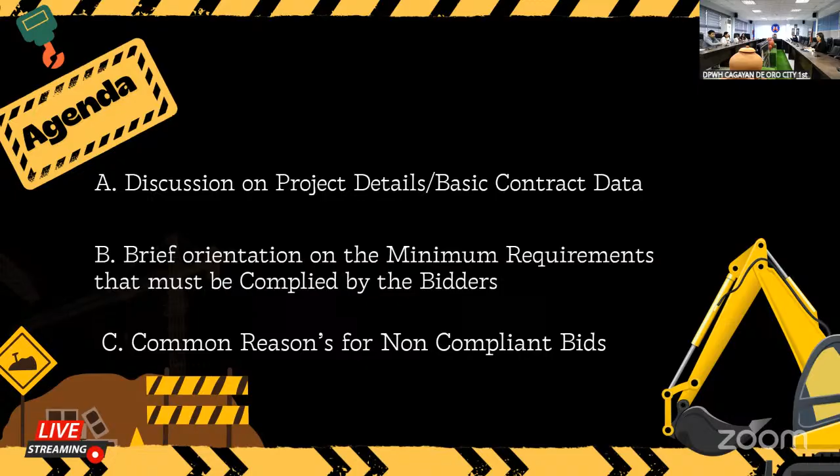Thank you, Gwen. So we are in quorum, so we'll now start the pre-bidding conference. So this afternoon, there are 5 projects scheduled, namely:

26KH0013, the contract name construction, completion of multi-purpose building, Barangay Center, Barangay Pagatpat, Cagayan de Oro City, with an approved budget for contract of 2,969,971 pesos and 30 centavos.

Second, we have 26KH0014, the contract name asset preservation, construction, upgrading, rehabilitation of drainage along National Roads, secondary roads, Carmen-Patag-Bulua Road, Chainage 0 to Chainage 130, station K1443 plus 531 to station K1443 plus 581, with an approved budget for contract of 6,447,839 pesos and 17 centavos.

So third project, we have 26KH0015. This is the rehabilitation of road at Barangay Bayanga, station 0 to station 0+200, Cagayan de Oro City, Misamis Oriental. This has an approved budget for contract of 4,293,805 pesos and 40 centavos.

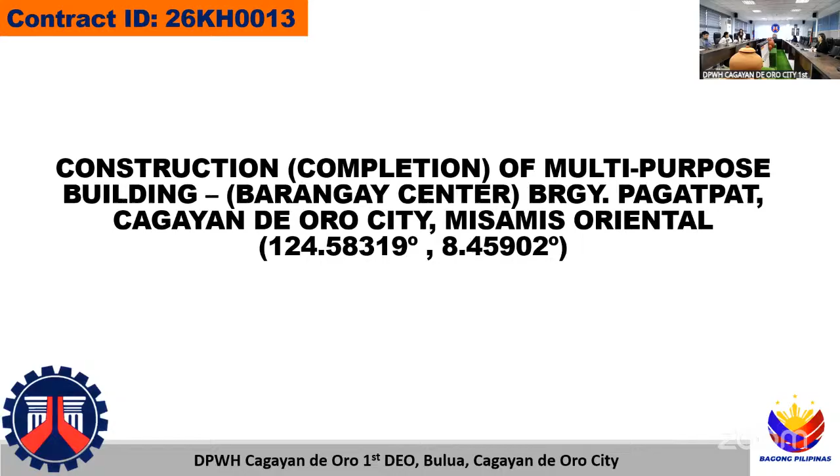So the scope of work of this project is mainly the construction of the extended two bays of the existing covered court with electrical works and elevation of the existing basketball court concrete slab with painting lines.

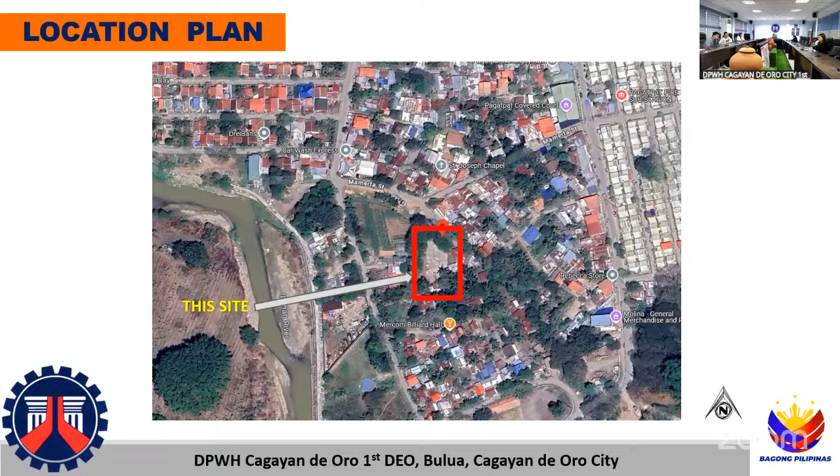So this is the location plan at Barangay Pagatpat, their Mamerta Street. As you can see on the red box, that is the site to be constructed. And this is the location plan.

And these are the site photos. So this is the existing building, or existing covered court and structures. As you can see, this is a perspective on your left side. That was the existing building structure, consisting of the covered court, concrete slab, and light fixtures.

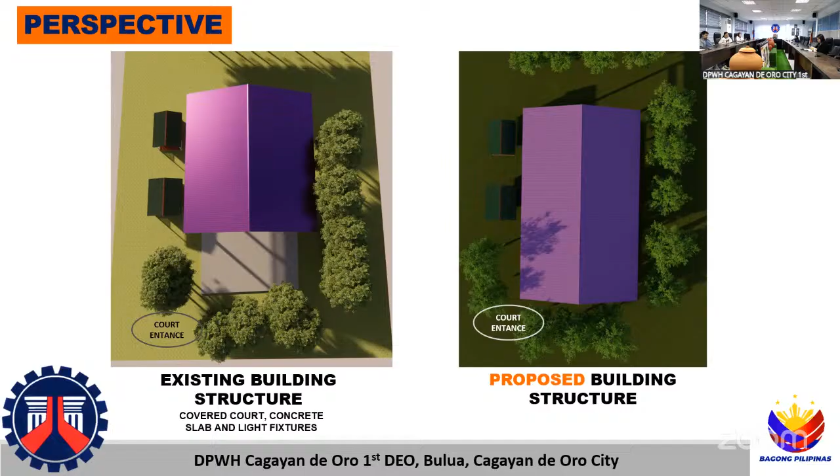On the right side is the proposed building structure to be constructed. So this is what the covered court would look like when two bays were added.

So this is our layout plan. As you can see, the red lines are the existing building and structures. And the blue lines are the proposed building and extension layout of that structure.

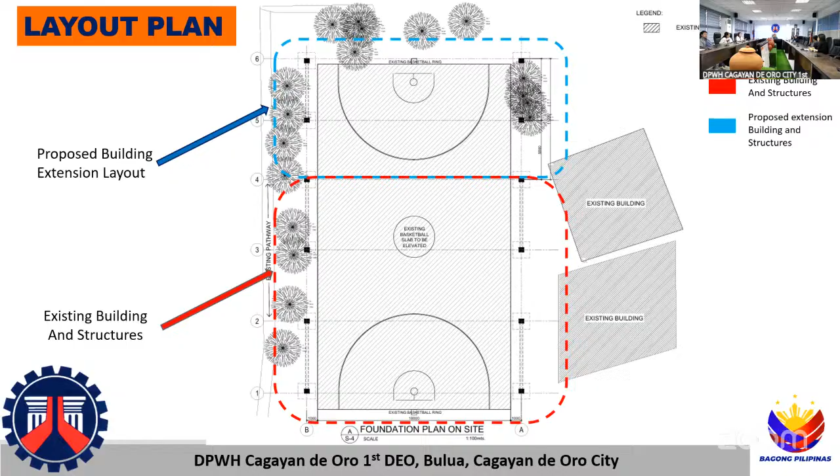So for the floor plan of architectural, we have the ground floor plan. As you can see, 8 columns are already existing.

And this is our roof plan. The roof plan is a gable roof or double roof slope, just like the existing roof.

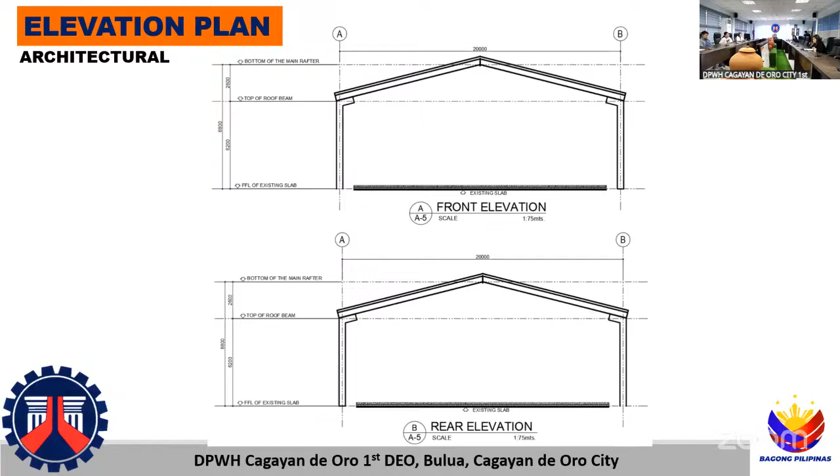So these are the elevations: the front, the rear, the left side, and the right side. The cross section and the longitudinal section.

So for structural, these are the foundation plan and the roof beam plan. And for the roof plan, we have the frames of the roof plan.

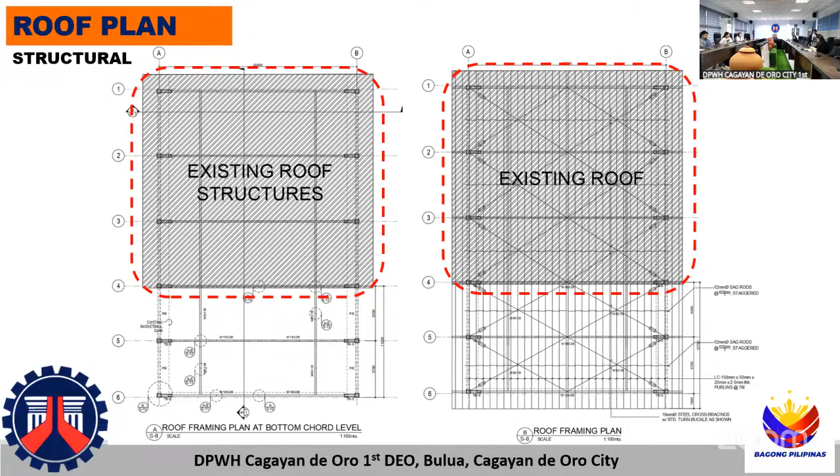And for the structural cross section and structural longitudinal section. Okay, so...

Just like the existing trusses, we're still using the same specification of our steel structure, which is the 16x36 and 8x80.

And these are our schedule for footing. We have footing 1,500 width and 1,600 length with thickness of 300.

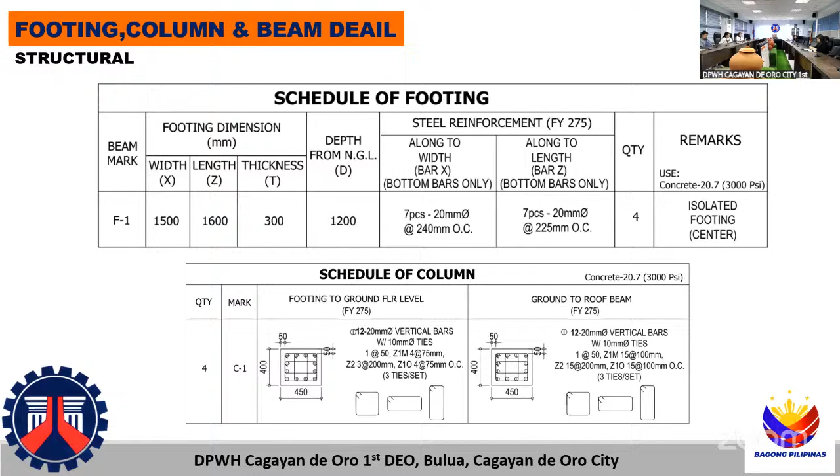And for the column, and for the concrete beams, and for the trusses.

And for the power layout, we only have 1 switch to be installed, and 4 of them already existed. And for the grounding, we only have 1 installation for the proposed, and also 1 for the roof air terminal.

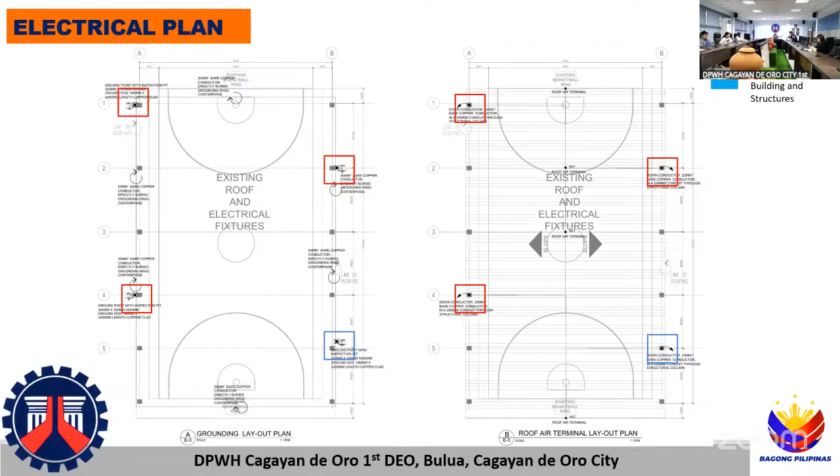So let's not forget our safety warning signs. We have proper PPE signage, safety first which are SF1 and SF2, hard hat area, danger deep excavation, beware falling debris.

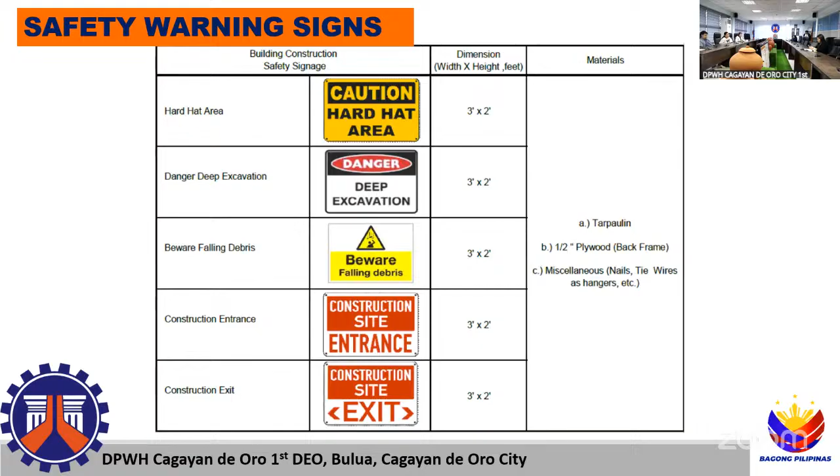Construction entrance and construction exit, safety harness, welding and hot work area, authorized personnel only, fall hazard, temporary material stocking area.

And for the summary of quantities, we have in Part B, other general requirements: B51, the project billboard signboard, which is 2 each.

B71, occupational safety and health, 1 lump sum. B91, mobilization and demobilization, 1 lump sum.

And for Part C, earthworks, we have 803-1A, structure excavation common soil, 31.35 cubic meter. 800-3, individual removal of trees above 900 mm diameter, 2 each.

804-1A, embankment from roadway structure excavation common soil, 70.22 cubic meter. 804-2A, embankment from borrow common soil, 38.86 cubic meter.

804-7, gravel fill, 58.56 cubic meter. And for Part D, reinforced concrete, we have 900-1C, structural concrete 3000 PSI class A, 28 days, 12.08 cubic meter.

902-1A1, reinforcing steel deformed grade 40, 4,654.05 kilograms. And 900-2C, structural concrete class B, 28 days, 67.60 cubic meters.

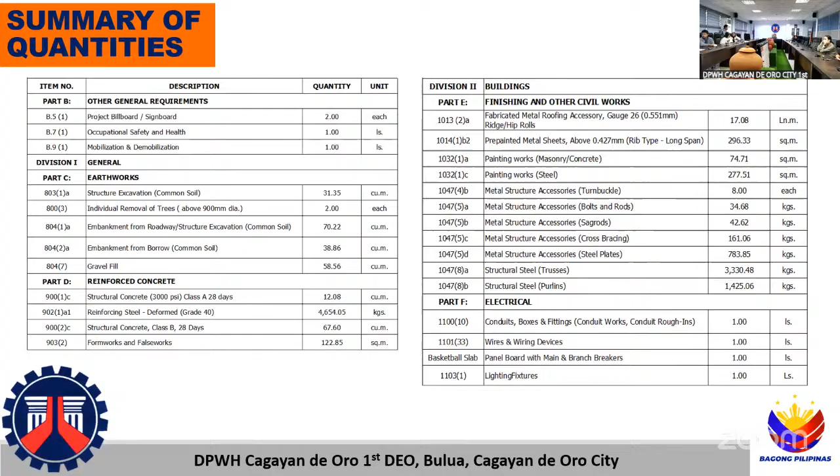For that part, I'm going to edit, I'm sorry. So for panel board with main and branch breakers, 1 lump sum. 1103-1, light fixtures, 1 lump sum.

And for the conduits, boxes, and fittings, this is our lump sum. And for wirings and other devices, for panel boards with main and branch breakers, and lighting fixtures.

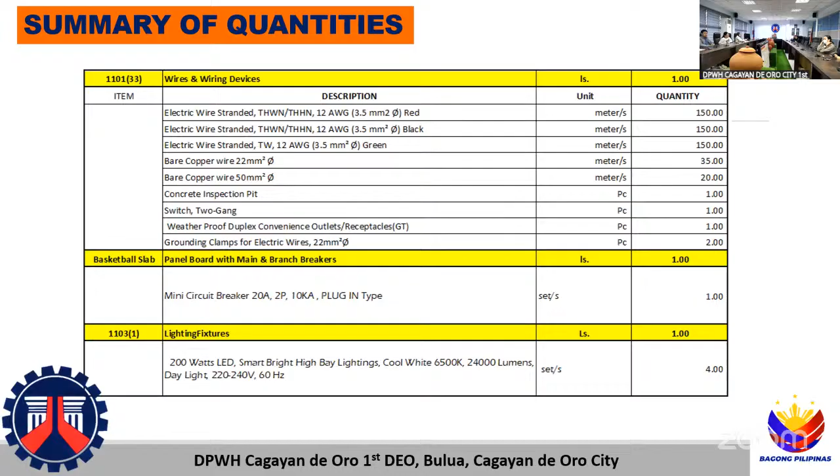And for minimum equipment requirement, we have stake truck cargo, 1 unit owned; concrete vibrator, 2 units owned; backhoe, 1 unit owned; dump truck, 1 unit owned; bagger mixer, 1 unit owned; bar cutter, 1 unit owned; bar bender, 1 unit owned.

Welding machine, 1 unit owned; material testing apparatus, 1 set owned; minor tools, 1 set owned; truck mounted crane, 1 unit owned and 1 unit leased; plate compactor 5 horsepower, 1 unit owned; chainsaw, 1 unit owned.

For number 3, grinding machine with accessories, 1 unit owned.

And that concludes my presentation. Thank you. Any clarifications?

Questions, clarifications? From our perspective, we have Sir Deo and Sir Nam. Do you have any questions? None so far, sir.

And also from our online viewers, we have questions. There's none, sir. And also we'd like to clarify...

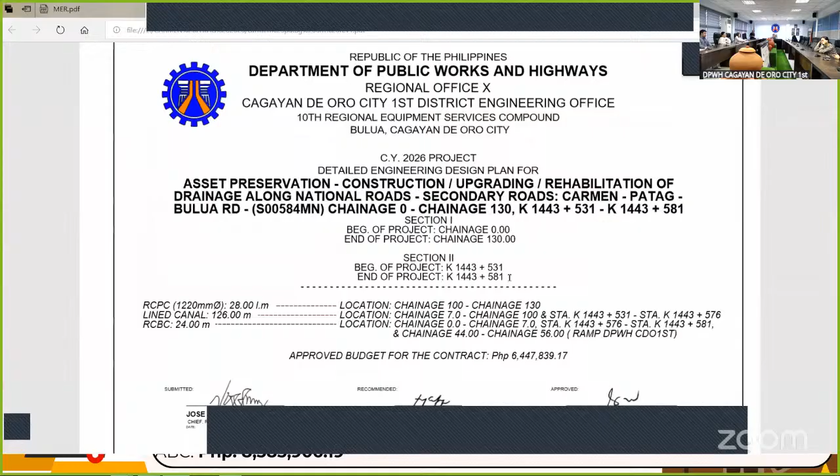I'll be discussing the asset preservation, construction, upgrading, rehabilitation of drainage along national roads, secondary roads, Carmen-Patag-Bulua Road, section ID S 00584 MN, Chainage 0 to Chainage 130, Station K1443+531 to K1443+581. Size of RCPC is 1,220 millimeter diameter, located on chainage 100 to 130. Lined Canal, 126 meters, located chainage 7 to 100, station K1443+531 to K1443+576. RCBC is 24 meters, located on chainage 0 to 7, station K1443+576 to K1443+581, and chainage 44 to 56. Approved budget for the contract is 6,447,839.17.

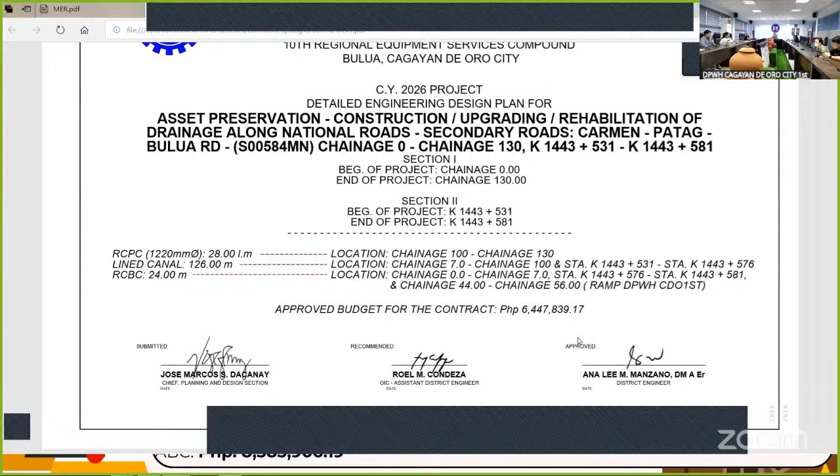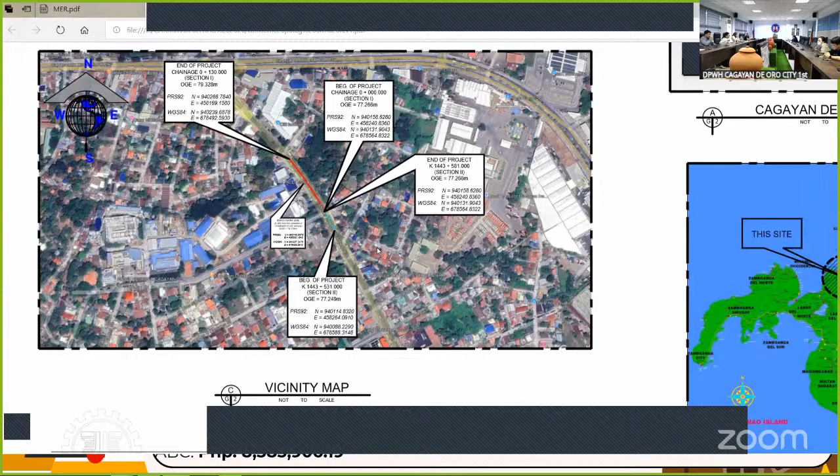This is the table of index of the content of this project plan. For general drawings, we have the vicinity map with all the details, the beginning and end of every section, Section 1 and Section 2, with PRS 92 and WGS 84 coordinates. You also have the location map.

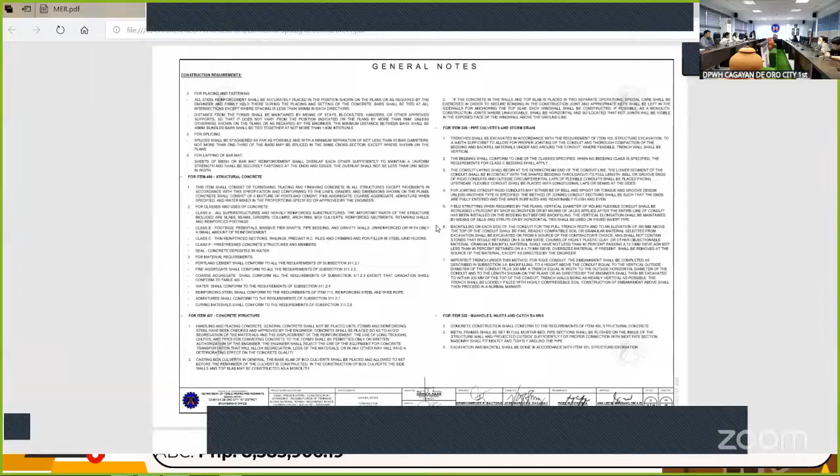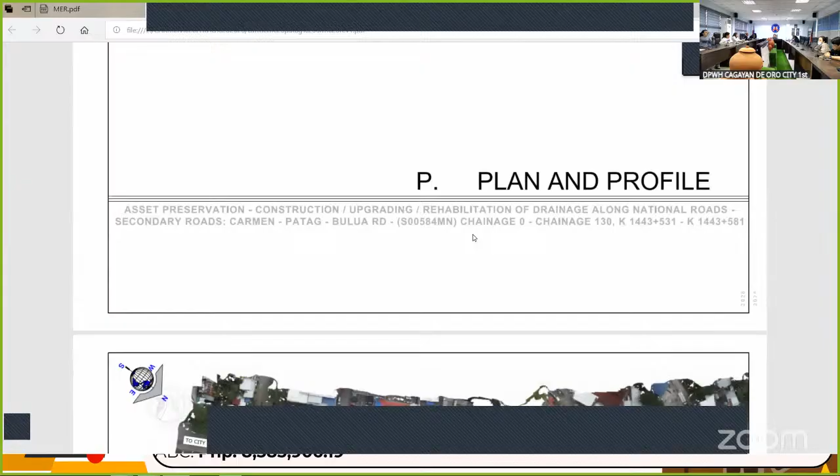This is the traffic management, which I'll discuss later, and project billboard details for plan and profile. Section 1 is located in front of DPWH First District. The 0 is the center line from the regional road, DPWH region office, to 130 meters. It's on the corner between the gas station and the co-op building. This is the plan and profile, designed in vertical elevation. Section 2 is aligned to Section 1, but before Section 1's location.

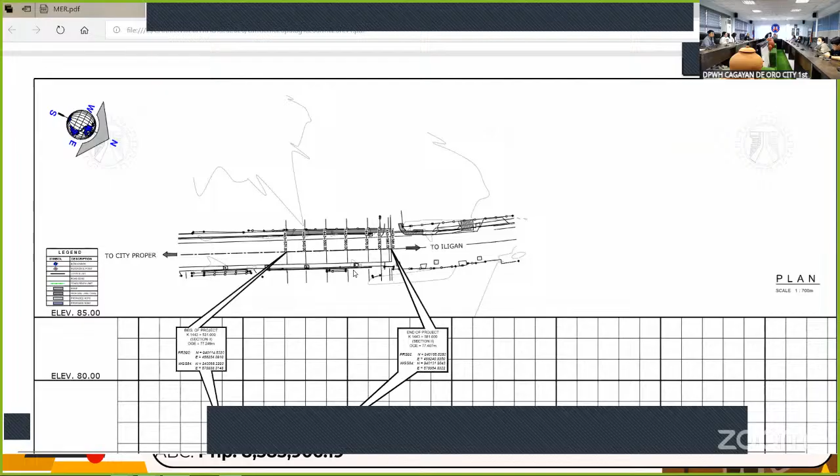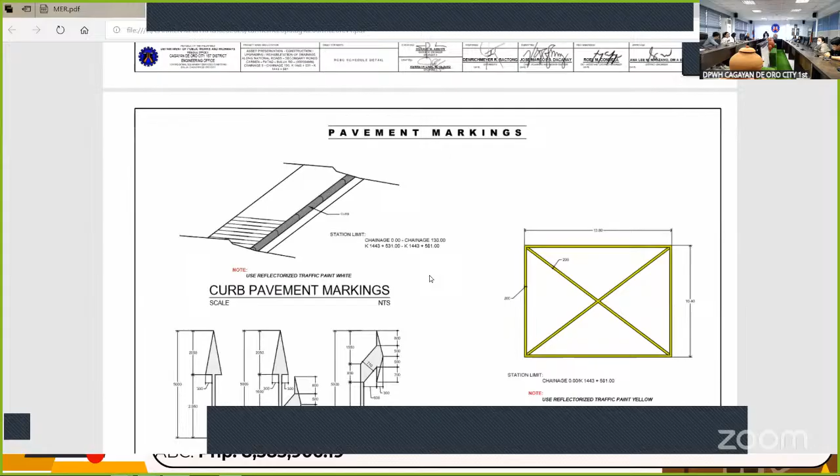Typical drawings — this is the typical detail, fix and removal and canal detail, RCBC schedule detail. Pavement markings include curb pavement markings, standard pavement arrows, and markings after the intersection. For electrical drawings, we have solar lights, which is why it's included in the plan. This is the detail, including the solar panel.

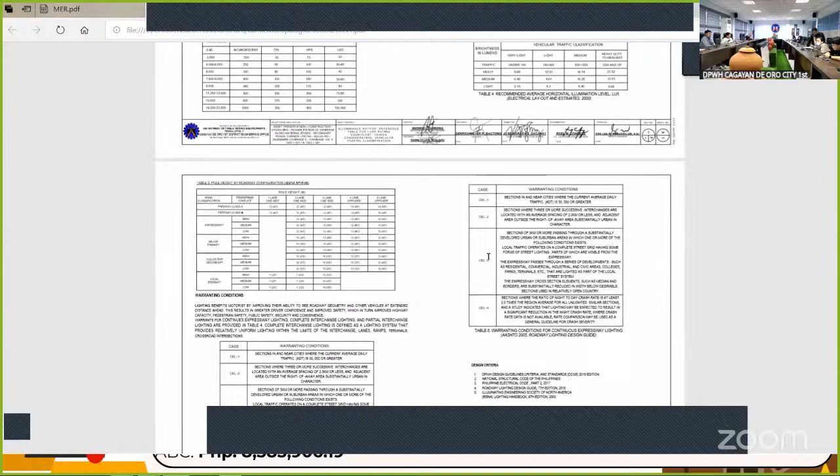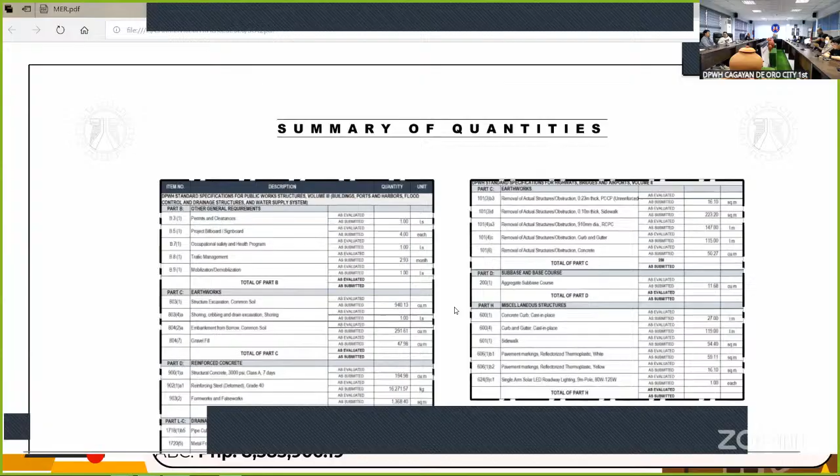For a summary of quantities, under DPWH standard specification for public works structures, Volume 3 — buildings, ports and harbors, flood control and drainage structures, and water supply system — we have 5 parts. Part B, general requirements: B.31 permits and clearances, 1 lump sum; B.51 project billboard signboard, 4 each; B.71 occupational safety and health program, 1 lump sum; B.81 traffic management, 2.93 months; B.91 mobilization, demobilization, 1 lump sum.

Part C, earthworks: 803(1) structure excavation, common soil, 940.13 cubic meter; 803(4)A shoring, cribbing and drain excavation shoring, temporary structure, 1 lump sum; 804(2)A embankment from borrow, common soil, 291.61 cubic meter; 804(7) gravel fill, 47.98 cubic meter. Part D, reinforced concrete: 900(1)A structural concrete, 3,000 PSI, Class A, 7 days, 194.98 cubic meter; 902(1)A1 reinforcing steel, deformed, Grade 40, 16,271.57 kilograms; 903(2) formworks and falseworks, 1,368.40 square meter.

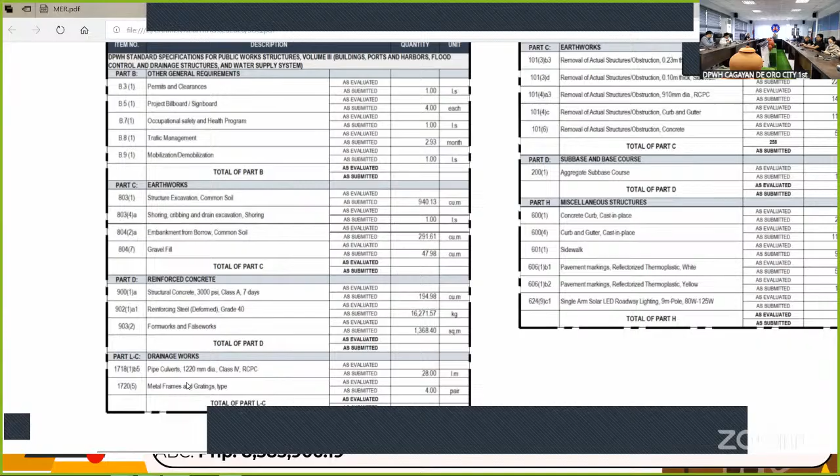Under Part LC, drainage works: 1718(1)B5 culverts, 1,220 millimeter diameter, Class 4 RCPC, 28 linear meter; 1720(5) metal frames and gratings, 4 pair.

Under DPWH standard specification for highways, bridges and airports, Volume 2, Part C earthworks: 101(3)B3 removal of actual structure obstruction, 0.23 meter thick PCCP and reinforced, 16.10 square meter; 101(3)D removal of actual structures obstruction, 0.1 meter thick sidewalk, 223.20 square meter; 101(4)A3 removal of actual structures obstruction, 910 millimeter diameter RCPC, 147 linear meter; 101(4)C removal of actual structure obstruction, curb and gutter, 115 linear meter; 101(6) removal of actual structure obstruction, concrete, 50.27 cubic meter. Part D, sub-base and base course: 200(1) aggregate sub-base course, 11.68 cubic meter.

Part H, miscellaneous structure: 600(1) concrete curb cast in place, 27 linear meter; 600(4) curb and gutter cast in place, 119 linear meter; 601(1) sidewalk, 94.40 square meter; 606(1)B1 pavement markings, reflectorized thermoplastic, white, 59.11 square meter; 606(1)B2 pavement markings, reflectorized thermoplastic, yellow, 16.10 square meter; 624(9)C1 single arm solar LED roadway lighting, 9 meter pole, 80 watts, 125 watts, 1 each.

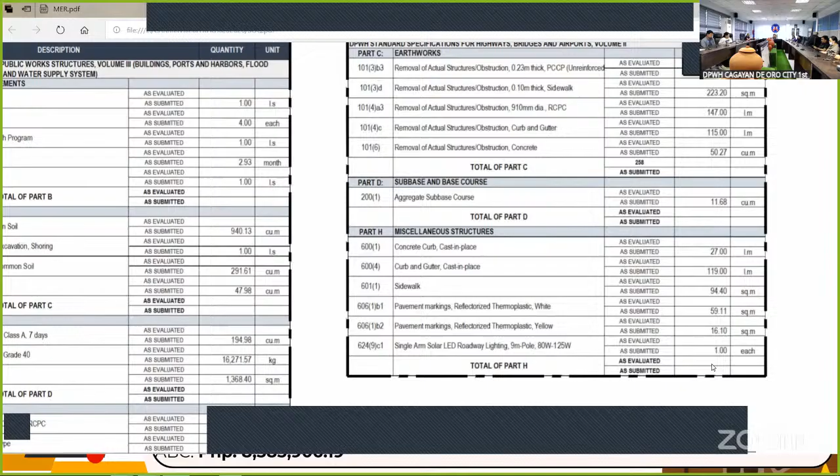This is the minimum equipment requirement required for the project construction.

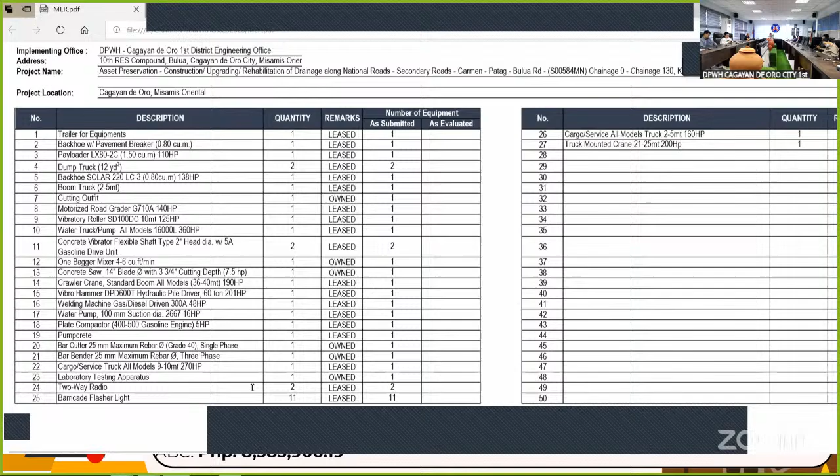Bar bender, 25mm maximum rebar diameter, 3-phase, 1 unit. Cargo or service truck, 1 unit. Laboratory testing apparatus, 1 unit. Two-way radio, 2 units. Barricade flasher light, 11 units. Cargo or service truck, all models, 2 to 5 metric tons, 1 unit. Truck mounted crane, 1 unit.

So that will be all. Any questions or clarifications from our prospective bidders? And from our online viewers?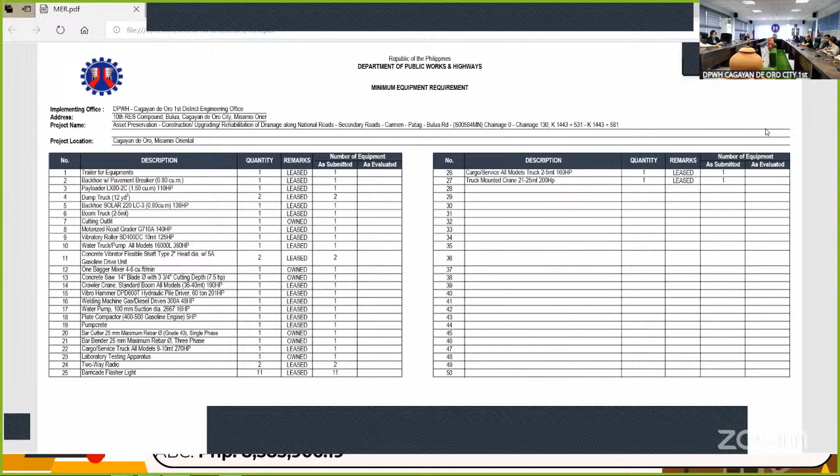So we proceed with the next project. This project is subject for visibility, so I'll update our prospective bidders, this project will be subject for bid. So the third project, 26KH0015, details of this project will be discussed by Engr. Aris Calisum.

Good afternoon, everyone. Rehabilitation of road at Barangay Bayanga, Station 0 to Station 200, Cagayan de Oro City, Misamis Oriental, Barangay Bayanga, Cagayan de Oro. This project has two sections: Section 1 has Station 0 to 146.12, and Section 2 has Station 0 to 53.88.

In total amounting to 200-meter length, the approved budget for the contract is 4,293,805.40. The scope of work is construction or improvement of the existing gravel road to a paved road with PCCP width of 3.05 meters, both sides, and thickness of 0.23 meters. There's also removal and replacement of the existing paved road in the beginning section of the project.

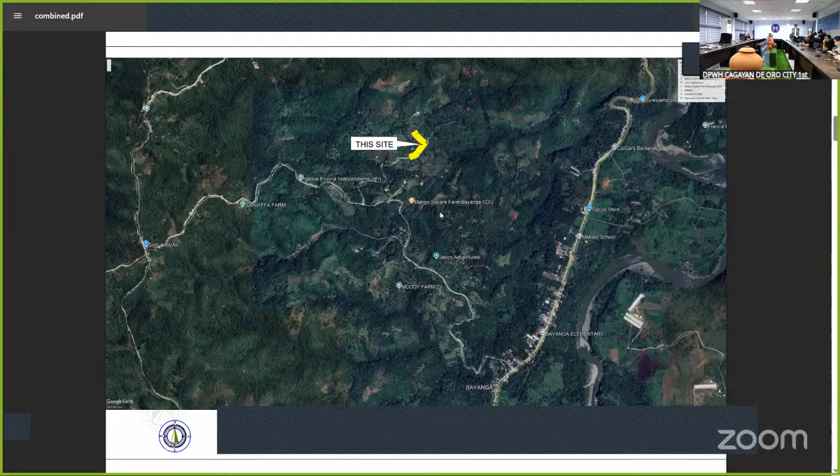And installation of solar LED roadway lightings. The general drawing shows it is located in Barangay Bayanga. If we look at this road, for familiarity, it's the road going to Hantiko Adventures, then you go to the right side. It's also the access road towards one of our tourism caves. So this is the site, and I have here Section 1 and Section 2.

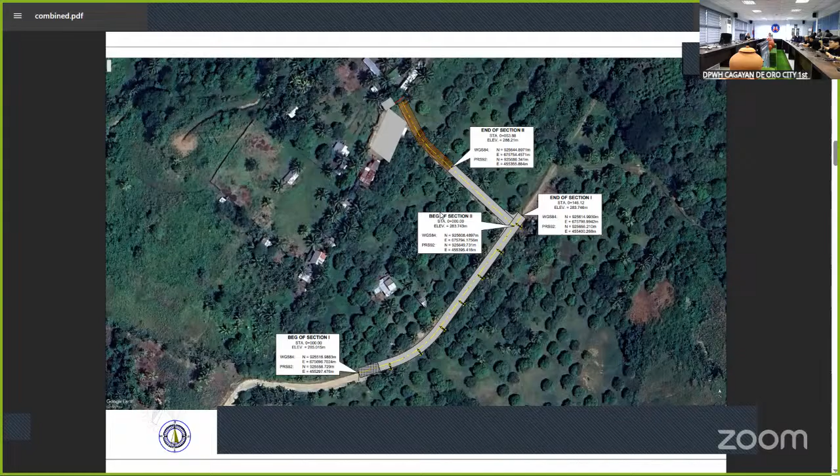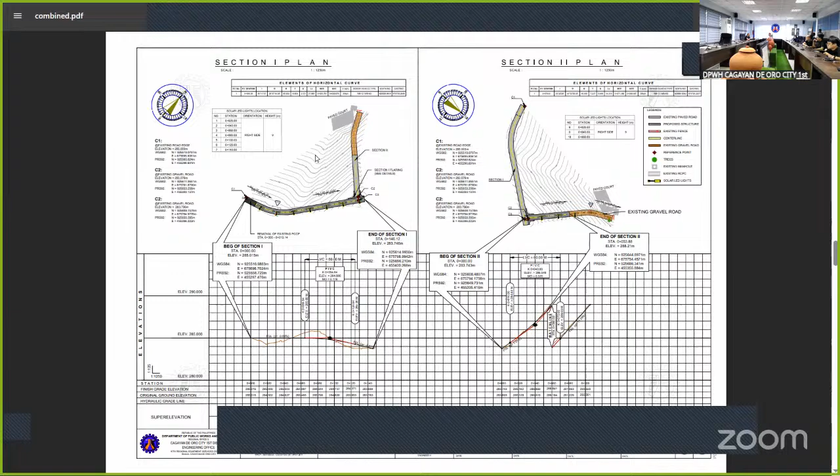So the beginning of Section 1 has a 13-meter remove and replace portion, then the rest is construction or improvement of gravel road to paved road. This is the disposal site plan. For familiarity, these are the site images, beginning and end of the project. For the plan profile, this is the plan and profile, also showing the placement of the solar LED roadway lighting.

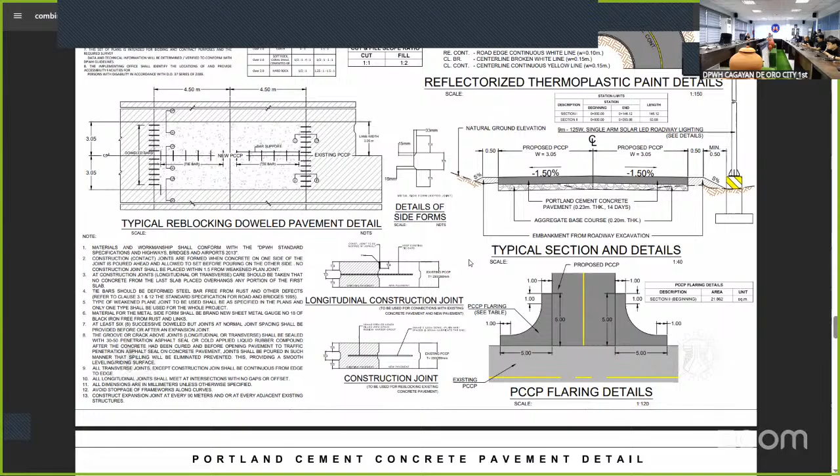For typical drawings, this is the typical drawing. The road will be composed of two lanes, 3.05 meters width, with installation of the solar lights, and also reflectorized thermoplastic pavement marking, with the details shown. There's also a junction from Section 1 to Section 2, so there's a need for PCCP flaring. For the PCCP details and geometric design, these are the standard drawings.

For the summary of quantities: B.5 project billboard and signboard, 4 each; B.7 occupational safety and health program, 1 lump sum; B.8 traffic management, 1.47 months; B.9 mobilization and demobilization, 1 lump sum; 1013B3 removal of actual structures obstruction, 0.23 meter thick.

PCCP unreinforced, 80.15 square meter; 1022 surplus common excavation, 468.72 cubic meter; 1031A structure excavation common soil, 15.84 cubic meter; 1041A embankment from roadway excavation common soil, 137.65 cubic meter; 1047 gravel fill, 1.44 cubic meter.

For item 2011 aggregate base course, 248.37 cubic meter. For 311C1 Portland cement concrete pavement unreinforced, 0.23 meters thick, 14 days, 1,241.87 square meter. Item 4041A reinforcing steel grade 40, 655.61 kilograms. Item 4051A2 structural concrete 20.68 megapascal class A, 14 days, 7.32 cubic meter. And 4056 structural concrete painting works, 8 square meter.

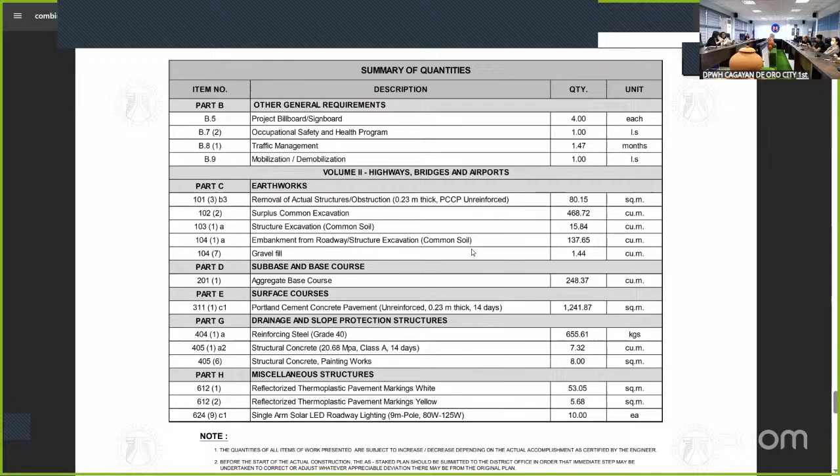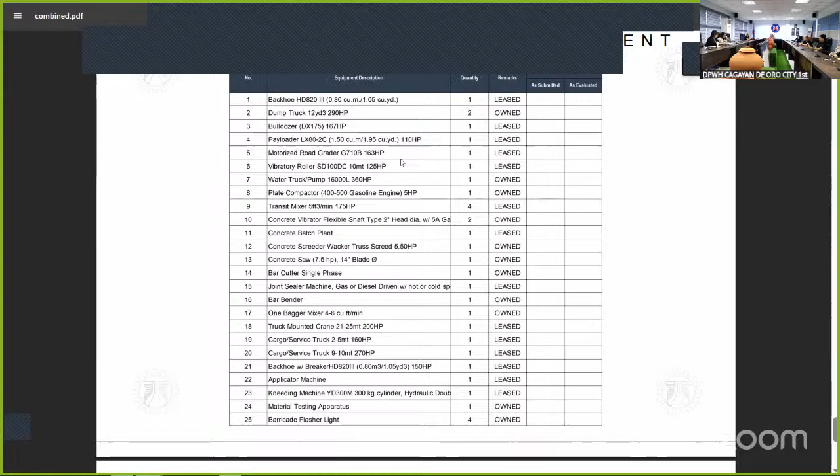For the minimum equipment requirement: backhoe, 1 unit; dump truck, 2 units; bulldozer, 1 unit; payloader, 1 unit; motorized road grader, 1 unit; vibratory roller, 1 unit; water truck pump, 1 unit; plate compactor, 1 unit; transit mixer, 4 units; concrete vibrator, 2 units; concrete batch plant, 1 unit; concrete screeder, 1 unit; concrete saw, 1 unit; bar cutter, 1 unit; joint sealer machine, 1 unit; bar bender, 1 unit; bagger mixer, 1 unit; truck mounted crane, 1 leased; cargo service truck 2 to 5 metric ton, 1 leased; cargo service truck 9 to 10 metric ton, 1 leased; backhoe with breaker, 1 leased; applicator machine, 1 leased; kneading machine, 1 leased; material testing apparatus, 1 unit; and barricade flasher light, 4 units.

That's all for this presentation.

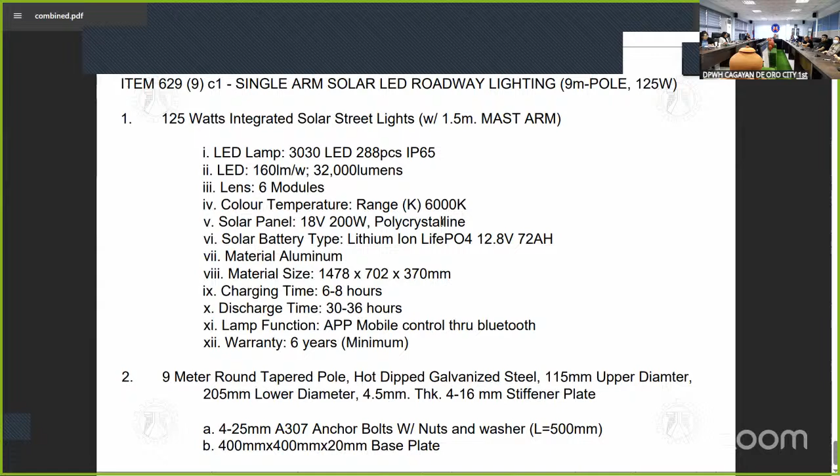So we proceed to the fourth project. This is 26KH0016, and the details of this project will be discussed by Engineer Sheena.

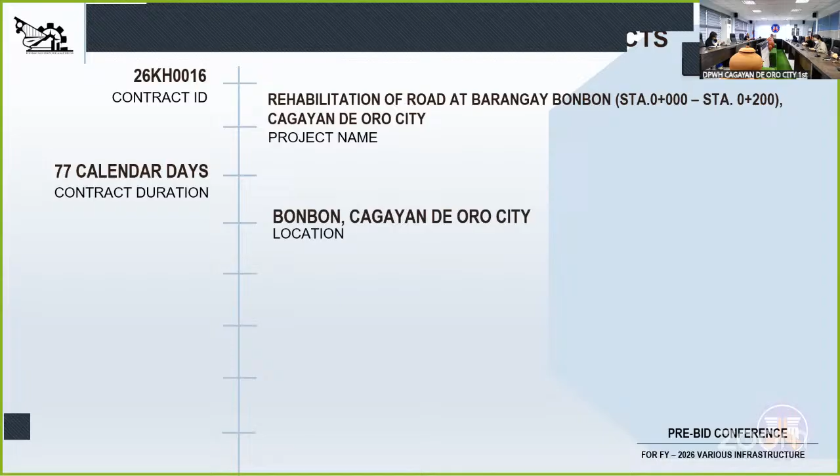Once again, good afternoon everyone, and to all our online viewers, good afternoon. Presenting to you 26KH0016, Rehabilitation of Roads at Barangay Bonbon, Station 0+00 to Station 0+200, with calendar days of 77. Location: Barangay Bonbon, with an ABC of 4,292,681 pesos and 91 centavos.

This is the location map of the project. It is located on Zone 1, Punta Bonbon, Cagayan de Oro City.

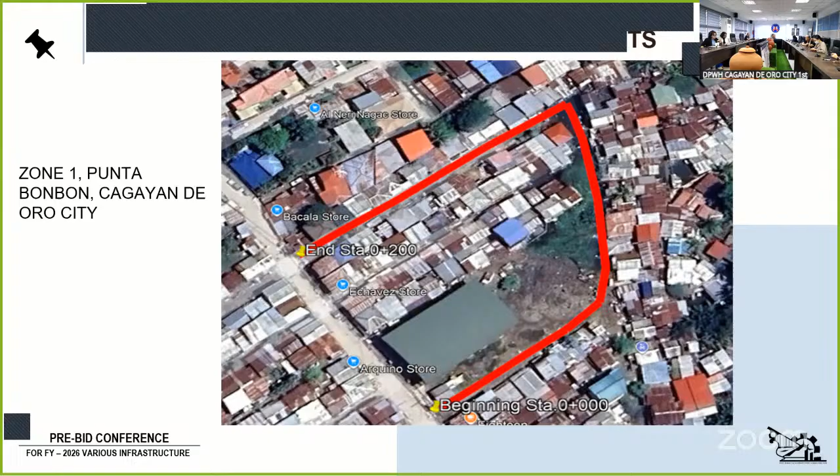The scope of work of this project is concreting of roads, improvement of gravel road to paved road. This is the beginning station and the end station, with a length of 200 meters, width of 5 meters, and thickness of 0.2 meters.

This is the typical drawing for Station 0+00 to Station 0+80, with a width of 2.5 meters on both sides.

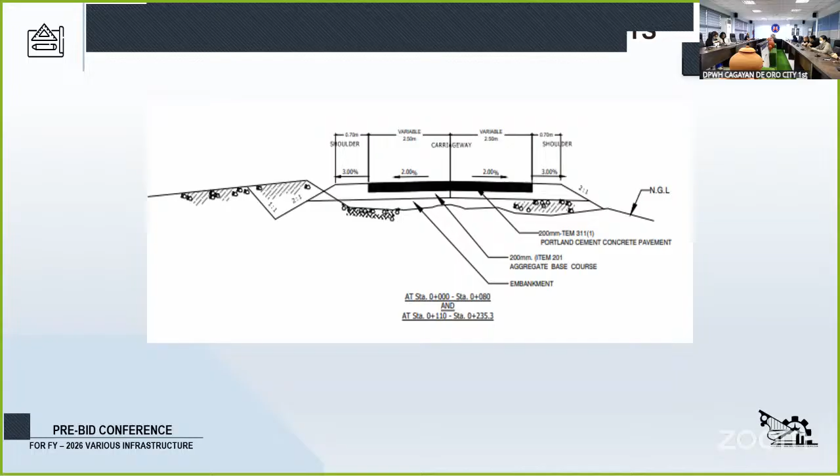And this is the typical drawing for Station 80 to 110. There is a grouted riprap and embankment, 200mm aggregate sub base course, and 200mm aggregate base course.

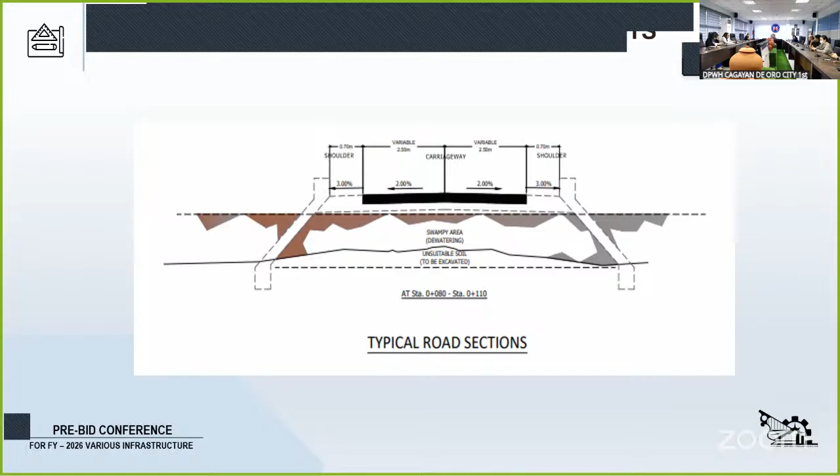This is the typical roadway section for the swampy area. And this is the typical plan for the street light.

Item Part B, other general requirements: B.3 permits and clearances, 1 lump sum; B.5, project billboard or signboard, 4 each; B.7(2), occupational safety and health program, 1 lump sum; B.8(2), traffic management, 1 lump sum; B.9, mobilization and demobilization, 1 lump sum.

For Volume 2, Highways, Bridges and Airports, Part C Earthworks: 100(3)a1, individual removal of trees, 150 to 300mm diameter, small, 10 each. 101(1), removal of structures and obstructions, dewatering, 1 lump sum. Item 101(6), removal of structures and obstructions, concrete, 3.13 cubic meters.

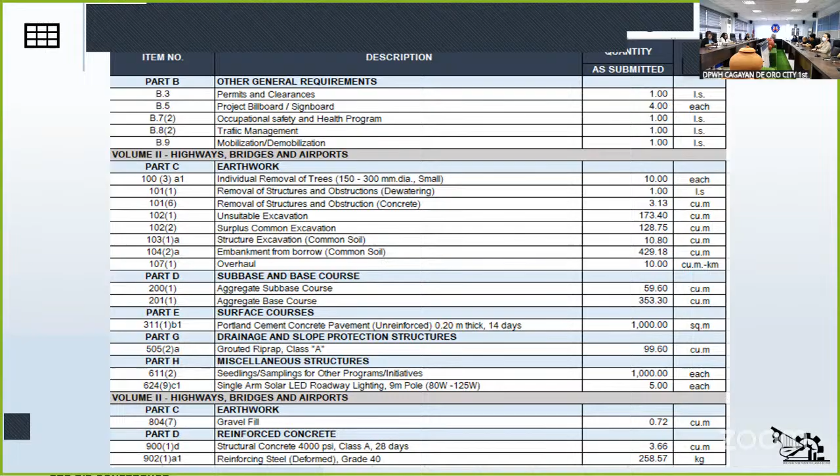For the minimum equipment requirement: two-way radio, 2 owned; barricade flasher lights, 10 owned; trailer for equipment, 1 leased; concrete vibrator, 2 owned; concrete spreader, 1 owned; concrete saw, 1 owned; mechanized joint sealer, 1 owned; plate compactor, 1 leased; vibratory roller, 1 leased; motorized road grader, 1 leased; dump truck, 1 leased; transit mixer, dump truck, 2 leased; transit mixer, 1 leased; concrete batch plant, 1 leased; chainsaw, 1 leased; boom truck, 1 leased; backhoe with pavement breaker, 1 leased; water truck pump, all models, 1 leased.

Bulldozer, 1 leased; payloader, 1 leased; backhoe HD8203, 1 leased; bar cutter single phase, 1 owned; bar bender 3 phase, 1 owned; bagger mixer, 1 owned; cargo service truck, all models, 1 leased; truck mounted crane, 1 leased; laboratory testing apparatus, 1 set, owned.

Quantities are subject for bid bulletin. That's all, thank you.

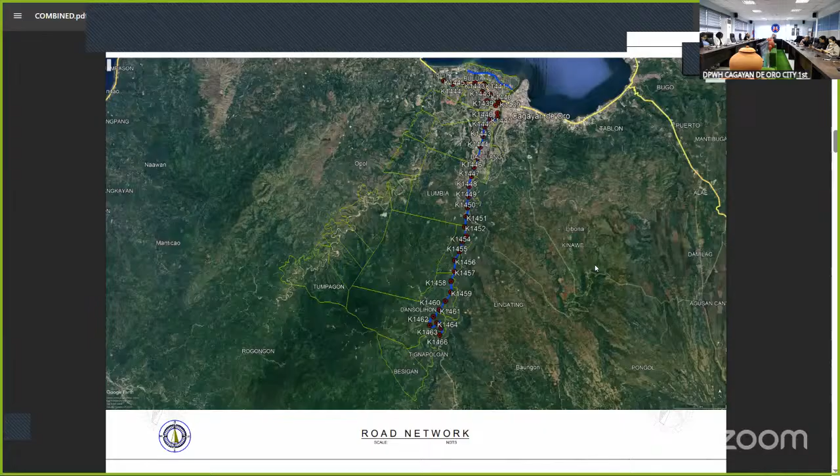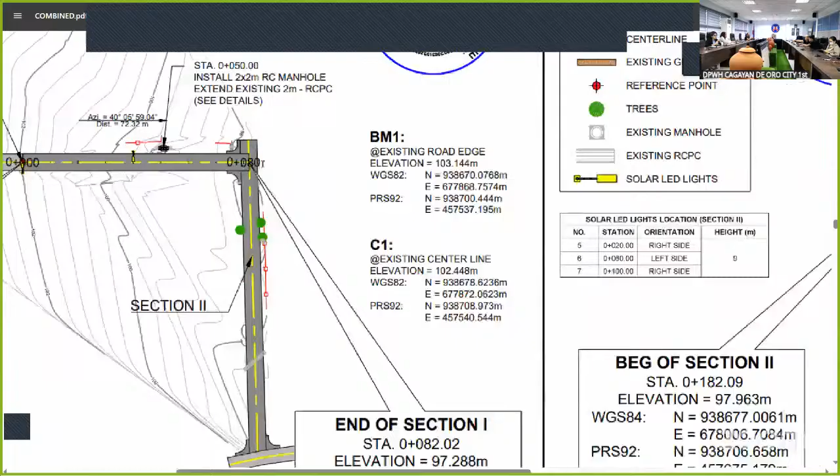This is the site disposal plan, and for the planning profile, this is the site planning profile. I want to articulate Section 1. There's a section where a pipe culvert was damaged, so we will repair it and replace it with 2 RCPC and a 2 by 2 meter reinforced concrete manhole, and extend 2 meters of RCPC. This is just a repair for the existing drainage area.

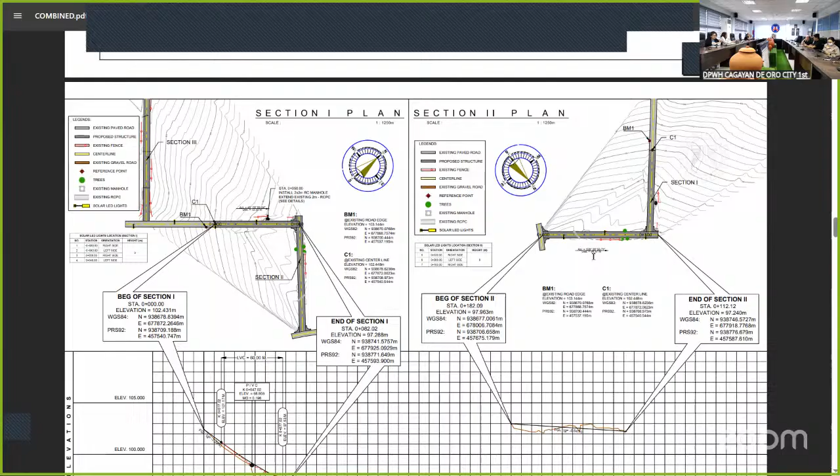Section 2 is improvement of the gravel road and solar street lights. Also at Section 3 and Section 4, there's a station gap, Station 31 to Station 100. Since the station limits have a limit of 500, there's a need for the station gap to accumulate and sum up the 500-meter length station.

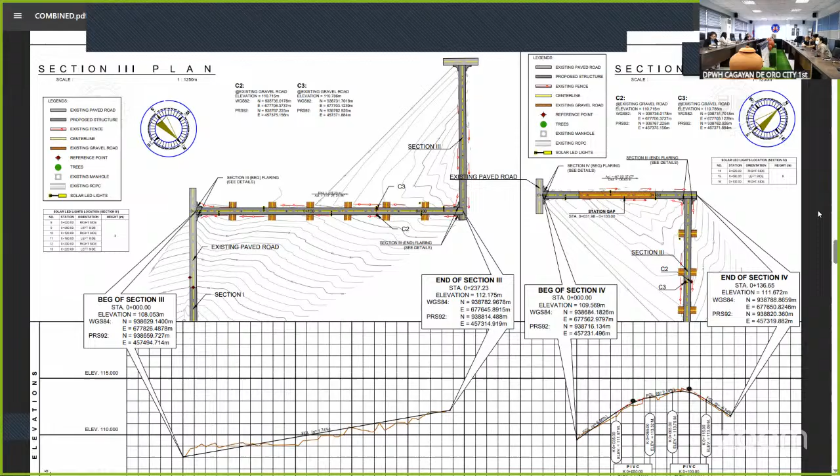For the typical drawings, we have a width of 3.05 meter roadway and PCCP 0.23 meters thick at 14 days, and aggregate base course of 0.2 meters thick. Construction also involves reflectorized thermoplastic pavement marking, and since there are junctions, there's a need for PCCP flaring details, as well as details for the repair of the manhole, repair of the broken drainage, and construction of the manhole.

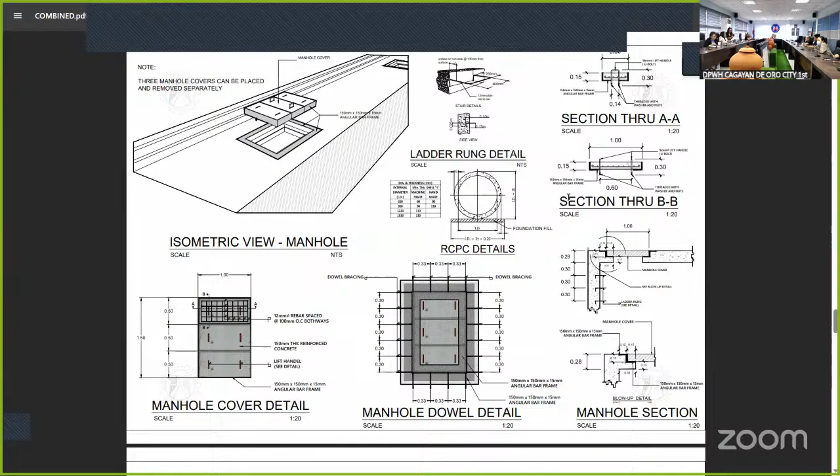For the summary of quantities: B.5 project billboard and signboard, each; B.72 occupational safety and health program, 1 lump sum; B.81 traffic management, 2.07 months; B.9 mobilization demobilization, 1 lump sum; 1022 surplus common excavation, 862.31 cubic meters; 1031A structure excavation common soil, 29.79 cubic meters; 1041A embankment from roadway excavation, common soil, 391.02 cubic meters.

1047 gravel fill, 2.7 cubic meters; 2011 aggregate base course, 631.58 cubic meters; 3111 C1 Portland cement concrete pavement unreinforced, 0.23 meters thick, 14 days, 3,157.9 square meters. 4041A reinforcing steel grade 40, 1,370.63 kilograms. 4051A structural concrete, 20.68 megapascal class A, 14 days, 15.5 cubic meters. 4056 structural concrete painting works, 12.80 square meters. 5001B3 pipe culvert, 910mm diameter class 4 RCPC, 2 linear meters.

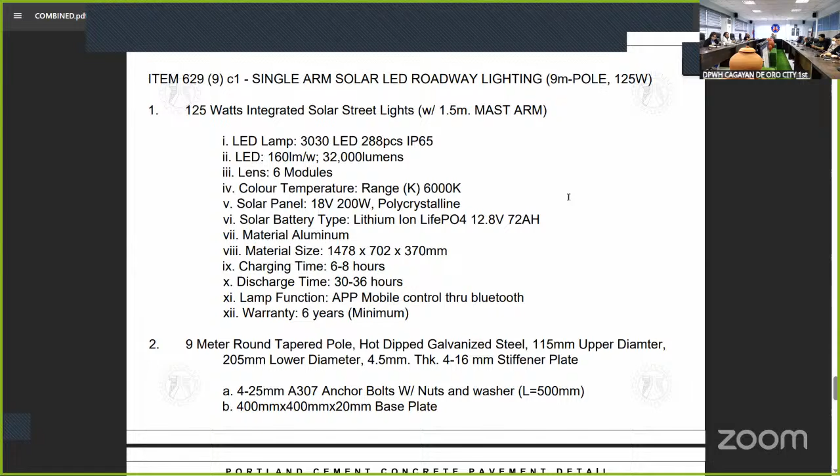This is the specification for the single arm solar LED roadway lighting, and the details of the PCCP and its geometric design standard drawings. So that's all for this project.

Any questions? Is there any questions or clarifications from our prospective bidders? And from Kagawad. We would like to thank, on behalf of Barangay Patag, for this another project that will be shared with us. Thank you very much, sir.

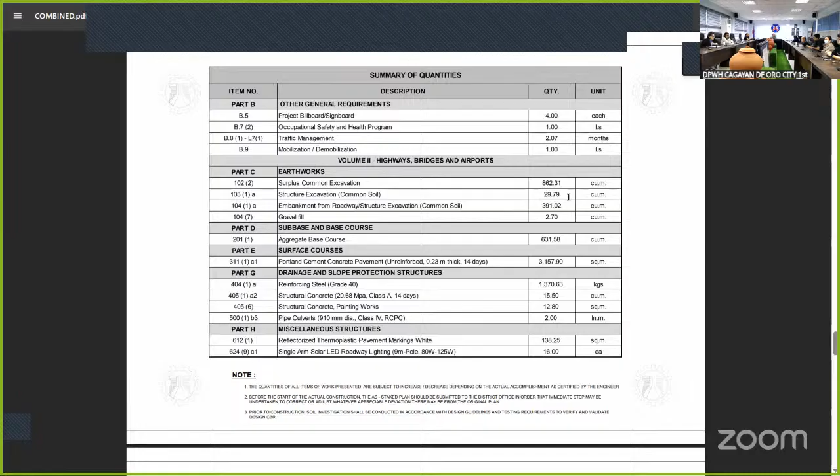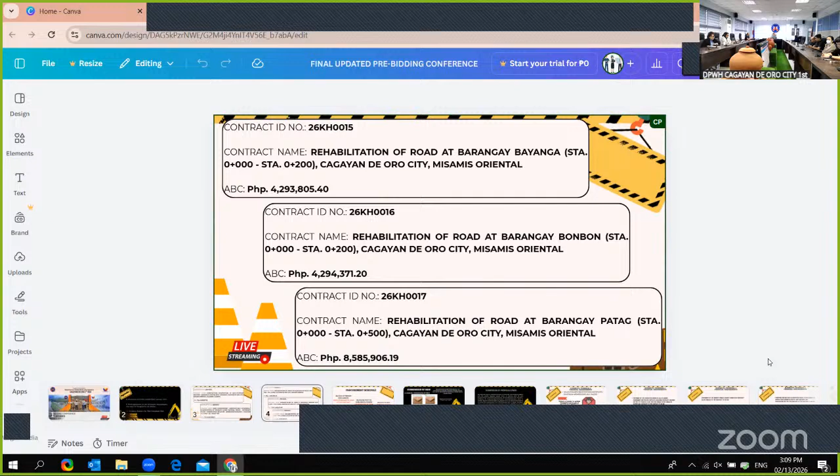I will be discussing the procurements, requirements and procedures for these infrastructure projects. These are the infrastructure projects with their corresponding contract IDs.

For the procurement schedule, the buying of tender documents will be until February 25, 2026 at 9:30 AM. The deadline for submission of bids will be on February 25, 2026 until 10 AM, and the opening of bids will follow right after the deadline for the dropping of bids.

For the submission of bids, the bid submission may be done manually or electronically. However, bidders should only select one mode of submission, either manual or electronic.

For the manual submission, we have the two envelope system. The first envelope will have the technical documents, and the second envelope will have the financial component. They must have one original and two copies for each component.

For the electronic submission, the details are stated in the bid data sheet in accordance with DEO 87, series of 2022.

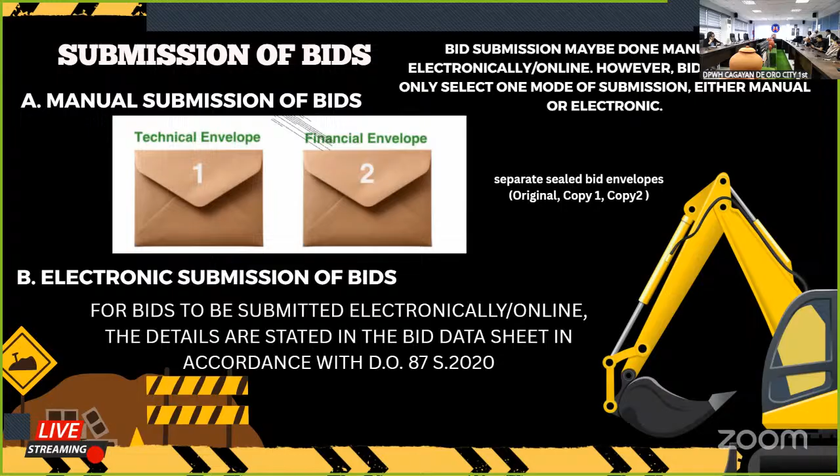Bid proposals will be submitted through an authorized representative together with the original notarized special power of attorney, or for sole proprietorship or partnerships, a joint venture resolution with secretary's certificate for corporations, partnership, joint venture, cooperative, which is contract specific, and presentation of a company ID or any government issued ID, to ensure the representative is an official member and to prevent fraudulent actions such as unauthorized use of other contractors' eligibility.

For the first envelope, the bidder must provide a valid and updated PhilGEPS registration certificate and platinum membership of PhilGEPS. Failure of the bidder to update the PhilGEPS certificate of registration shall result in the automatic suspension of the bidder's certificate.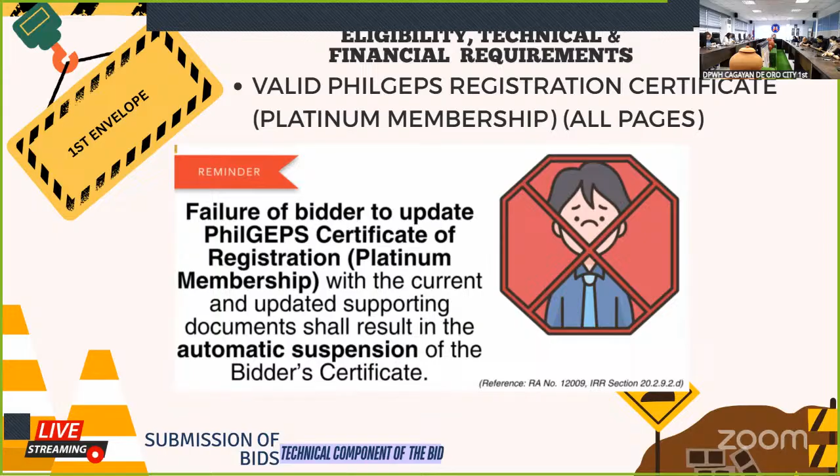Next, the bidder must provide a statement of all ongoing government and private contracts, including contracts awarded but not yet started. The bidder must also provide a statement of the single largest completed contract, or SLCC.

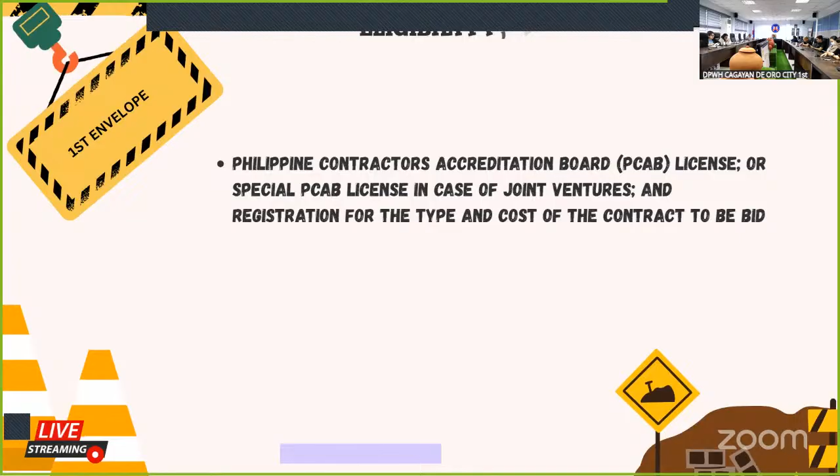Also, they must provide the PCAB license or special PCAB license for joint ventures.

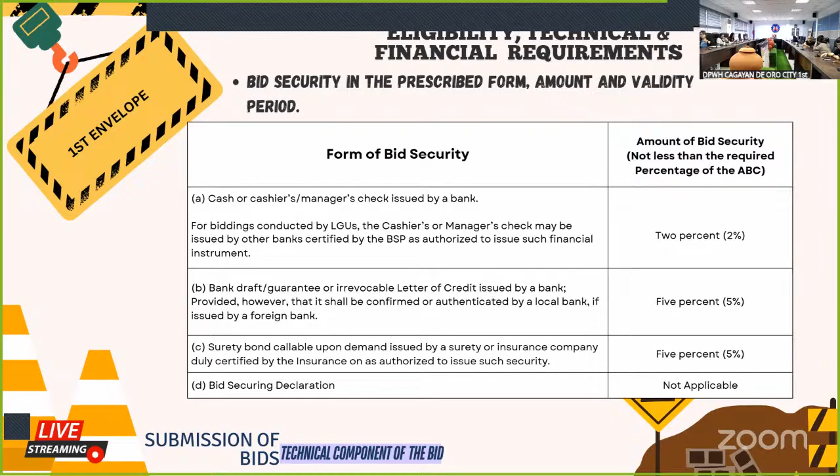Next, they must provide the bid security. We have four forms of bid security: cash or cashier's check, bank guarantee, surety bond, and bid securing declaration, with their corresponding bid amount. The bidder will only choose one form to be submitted.

For the project requirements, the bidder must provide an organizational chart for the contract, the list of contractor's key personnel, and the list of contractor's major equipment units which are owned, leased, and/or under purchase agreement. Please see the attached bidding documents for the required years of experience for key personnel and the required number of units and capacity for major equipment.

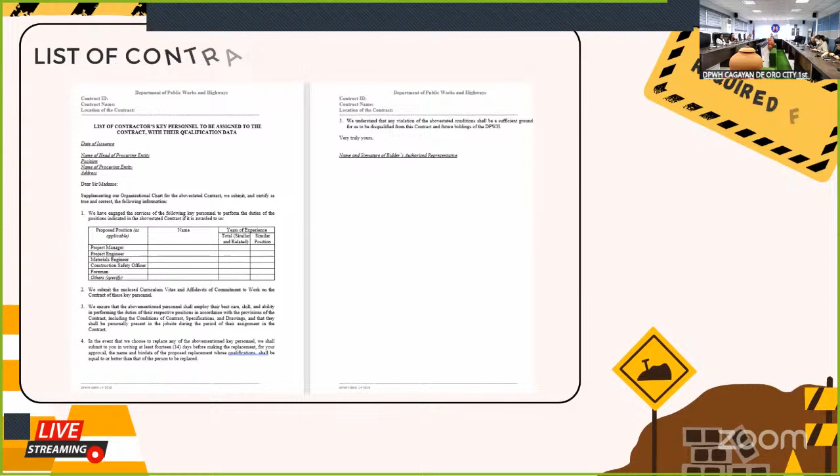This is the standard form for the organizational chart, the list of contractor's key personnel, and for the major equipment units.

Next, the bidder must provide an original, duly signed, omnibus sworn statement, the latest General Information Sheet or GIS including the beneficial ownership, duly received by the SEC corporation, sworn statement of eligibility and beneficial ownership, and the prospective bidder's NFCC, and if applicable, a joint venture agreement.

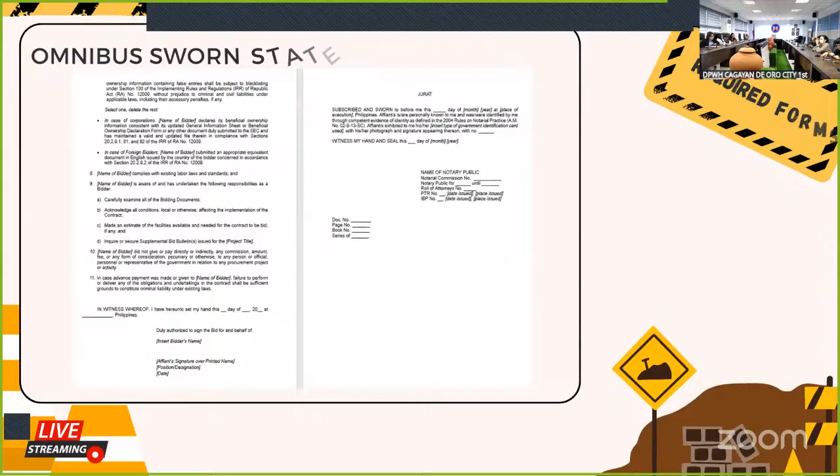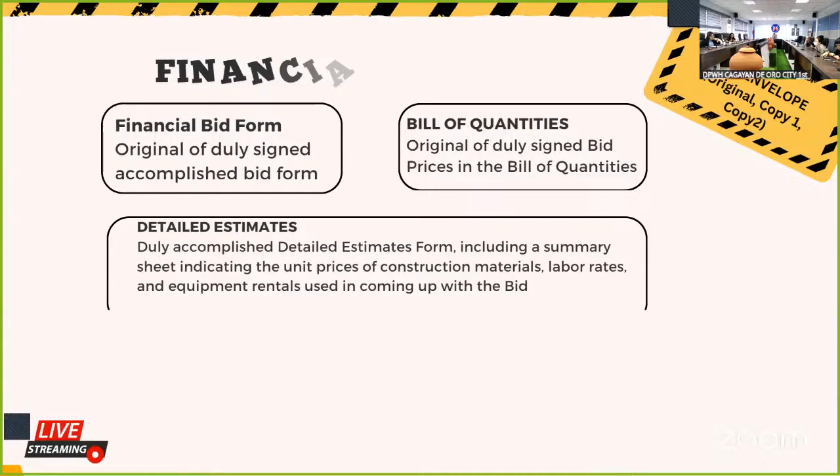For the second envelope, we have the financial components of the bid. The bidder must provide the financial bid form, the bill of quantities, the detailed estimates, and the cash flow by quarter, which must be duly signed and original.

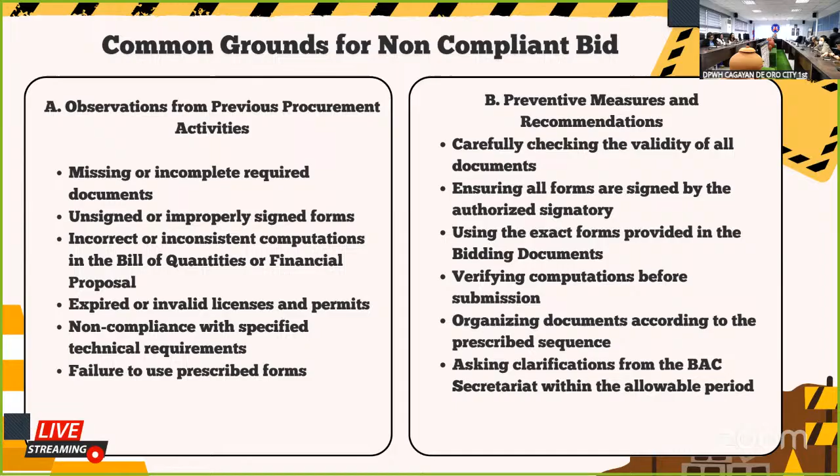So, are there any questions? That's okay. If not, it may continue.

That is all, Mr. Chair.

Thank you, Engineer Girlat. Any clarification? Hopefully it won't be revised again. None so far. Okay. Comments from the live viewers. So I think that's all. Sure. Discuss. Second.